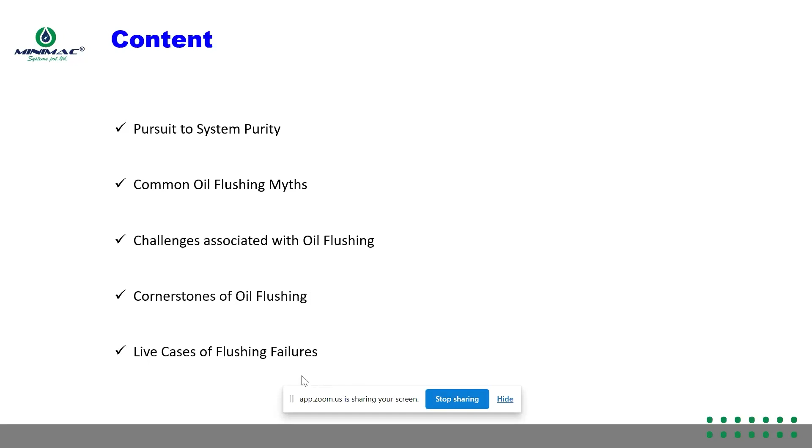Flushing is high velocity flow of low viscosity fluid through a pipeline or a component or a cavity. So I think the machine that you have from Minimac, you can use it for pipeline flushing or associated equipment. You can flush simultaneously. So in that case, you may find a lot of equipment in the field, whether at pre-commissioning stage or at shutdown stage, where you can use this equipment.

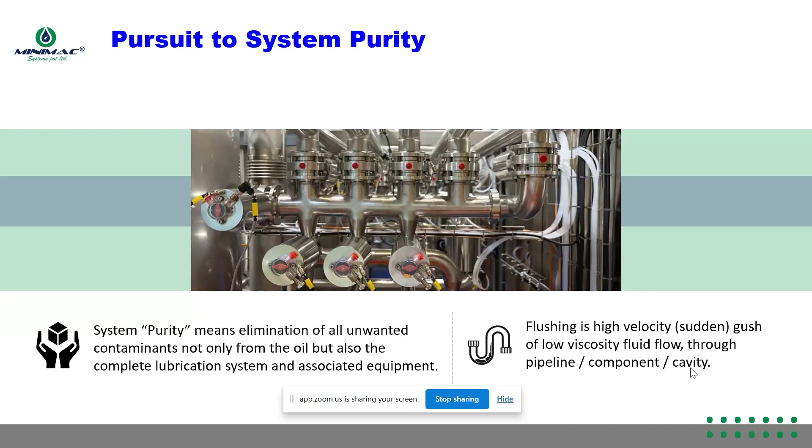Another example, if we see, is a steel plant project in India where there was a failure in a turbine driven blower after commissioning because they did not flush the system before taking it into work. So in a steel plant, the loss was approximately $10 million. Application was turbine driven blower needs to be flushed.

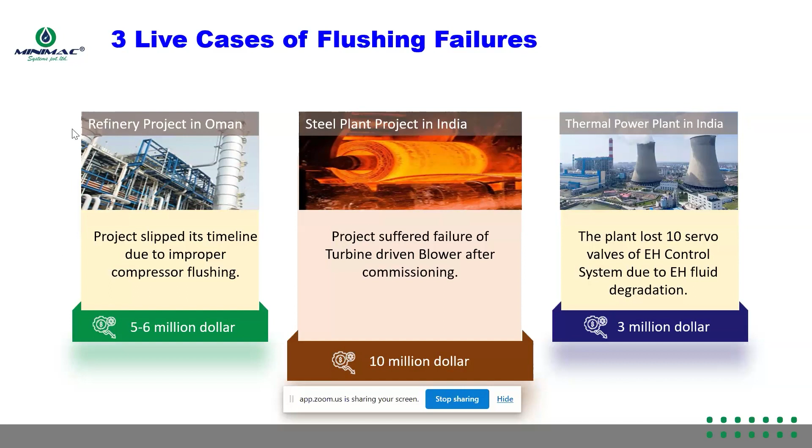So in actual practice, when people visit customers or site or interact with people on a frequent basis, there are certain myths or misbeliefs that they come across. Number one is that oil flushing is only a pre-commissioning activity.

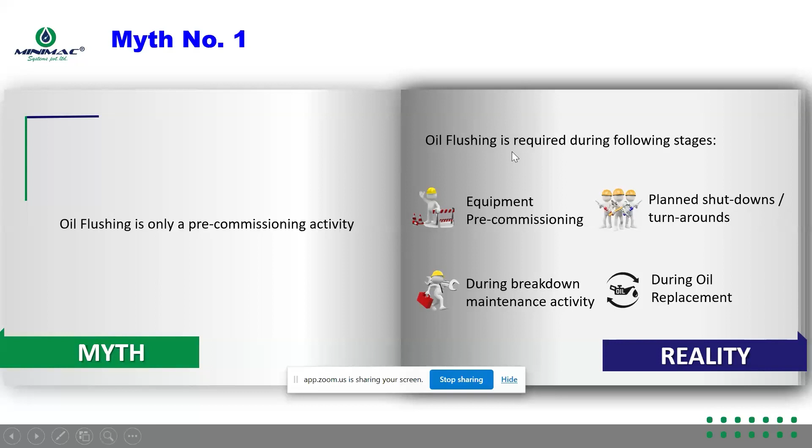So people do believe worldwide that only in pre-commissioning stage flushing has to be carried out. But in actual, along with pre-commissioning activities of an equipment, flushing can also be carried out in a plant shutdown or turnarounds, during any breakdown maintenance activity or in case any breakdown has happened, also during the oil replacement. So these are the four stages where flushing can be carried out.

The other myth that we come across is on-site oil flushing is redundant if rotary equipment was factory flushed and tested by OEM. So people do believe that if the original manufacturer has done the flushing of this part, then there is no need to flush. Instead, at times we have seen that the flushed equipment or the pipelines also do carry certain impurities, the debris or the welding marks, especially the rusting is present there. You can see the photographs.

So normally all the fabricated lines or the interconnected pipelines, any other fabricated equipment may have impurities if it is not properly flushed by the OEM. So in that case, even if the OEM is claiming that this is factory flushed, you may still ask the people to have a check, and there are chances that you may get the opportunity to flush it properly.

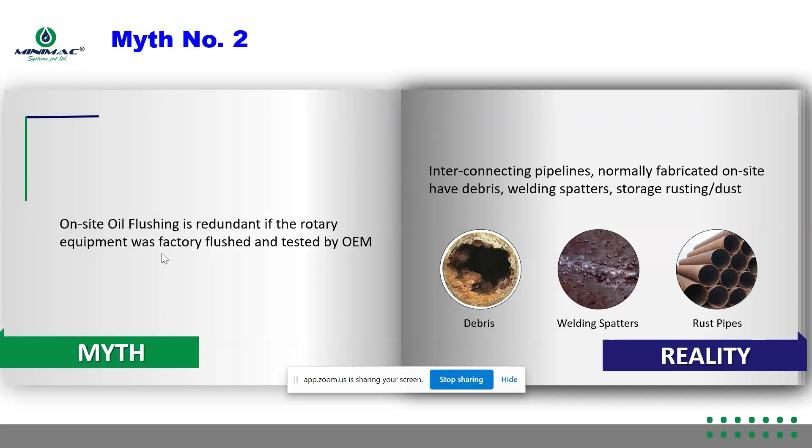Another myth is if chemical cleaning has been performed properly, then there is no need of oil flushing. So in that case, if you can see the photographs here, traces of water and chemicals which are mixed into the oil after cleaning of pipeline. So if any traces of water or chemical from the chemical cleaning are present, as soon as your client puts oil into the system, it will get emulsified, it will get mixed with water, it will get mixed with the chemicals

that were left behind. That chemical need not be filled in the system, but it can also stick to the walls of the pipeline, to the sides of the equipment. It can be anywhere. So in that case, oil will degrade instantly the moment it comes into contact with water or the chemicals used for chemical cleaning. So even after chemical cleaning has been done, oil flushing is a mandatory activity.

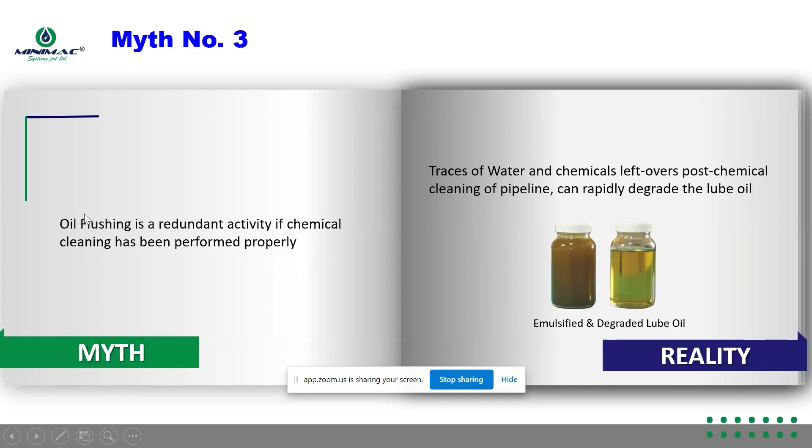Moving on to the next myth that most people come across: efficient oil flushing happens at very high pressure. So this is exactly not how it works. For flushing, a Reynolds flow calculation is present. I will also share this formula with you, or it will be easily available across the web. Reynolds number calculation, we call it. So in ideal conditions, for flushing to be very effective, Reynolds number should be greater than 4,000. If Reynolds number is more than 4,000, turbulence is created in the oil, and with turbulence created, it is best suitable for oil flushing.

So this is a very general and common myth that we come across even at Minimac. Your team also may come across this, that we need high pressure, pressure of 100 or 200 or 400 bar. In that case, we just need to ensure that the flow is turbulent, which means Reynolds number needs to be greater than 4,000. So fluid pressure will not play a major role, but instead, flow rate calculation will be playing the big role.

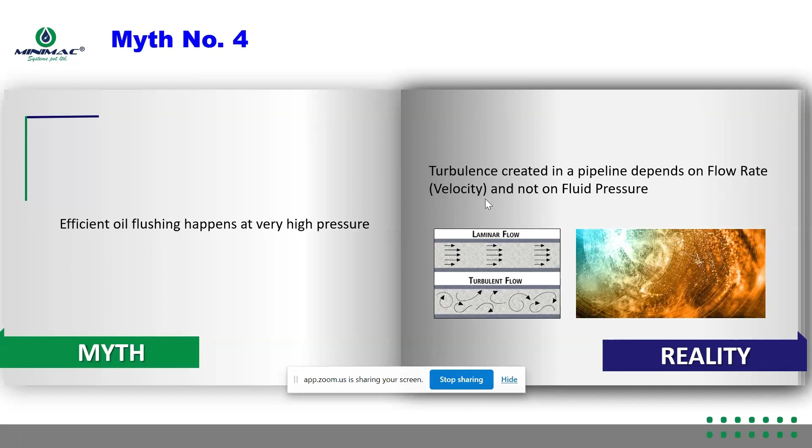Any questions till now, gentlemen? No question yet. Thank you. Moving forward,

another common myth that we see: oil flushing flow rate is decided based on the largest diameter pipeline of the lubrication system. In this case, it is not just the largest diameter pipeline of the lubrication system, but also the branches of the pipelines. Suppose there are multiple pipelines coming out of the bigger pipeline. In that case, all the pipelines need to be flushed properly. So this is a complete myth that only our biggest pipeline, being 4 inches, 6 inches, or 8 inches, matters. Instead, we should also consider the branches of the pipelines.

This is a very common case where hydraulic power packs are used, or in case heat exchangers are used. You can see in the photograph here, a skid is made up and multiple lines are coming up. So the bigger pipeline might have a larger diameter, but certainly we need to consider the small pipelines also, which are coming out. So when you are doing the flow rate calculations for the flushing, you need to consider all the pipelines which are associated to the system that we are going to flush out.

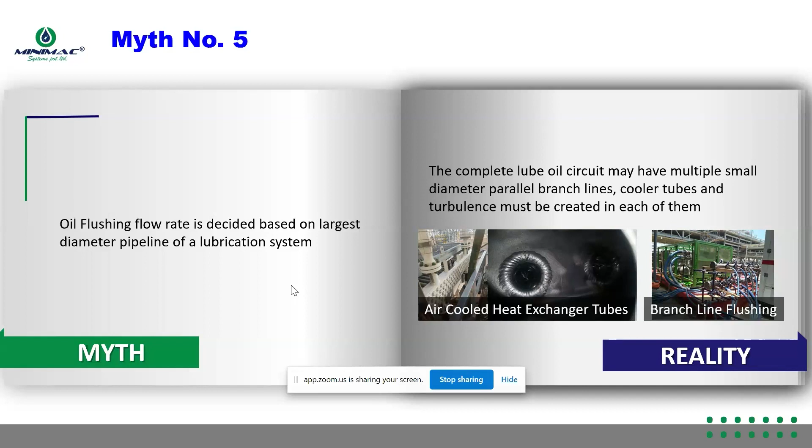Moving to our next myth, oil flushing is all about attaining and generating reports on NAS 1638 or ISO 4406. These are standards for oil cleanliness. So it is a very common myth that if the NAS or ISO values are attained, the oil is very clean. In fact, this is a myth we are experiencing worldwide.

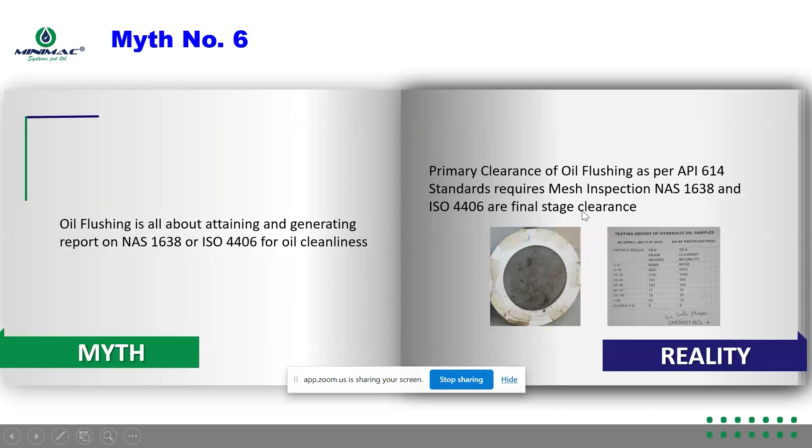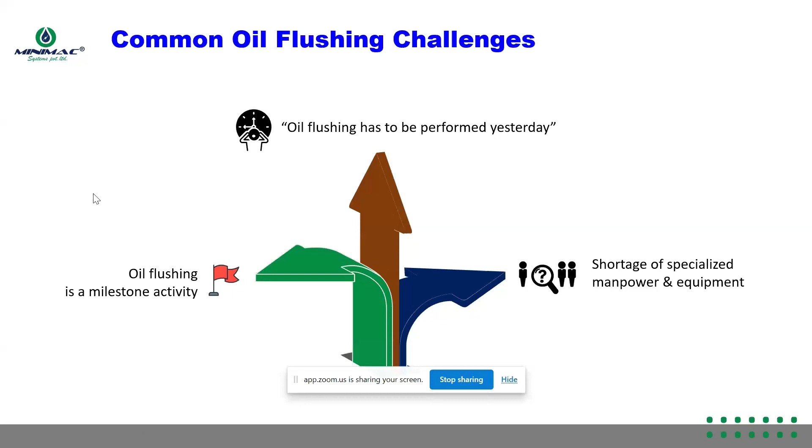I will just showcase the previous slide where this was mentioned. So you see NAS class, ISO class, and mesh inspection. These three could be the defining parameters of the milestone that has to be achieved for oil flushing. Because at a certain point, when this milestone is achieved, this activity has to be considered completed and flushing is done.

The lower the fluid viscosity, the better the chances of obtaining better cleanliness. In this case, I would certainly tell you, if you are flushing with oil of 32 cSt, or VG32 hydraulic oil, you will certainly find a higher Reynolds number compared to using a higher viscosity oil.

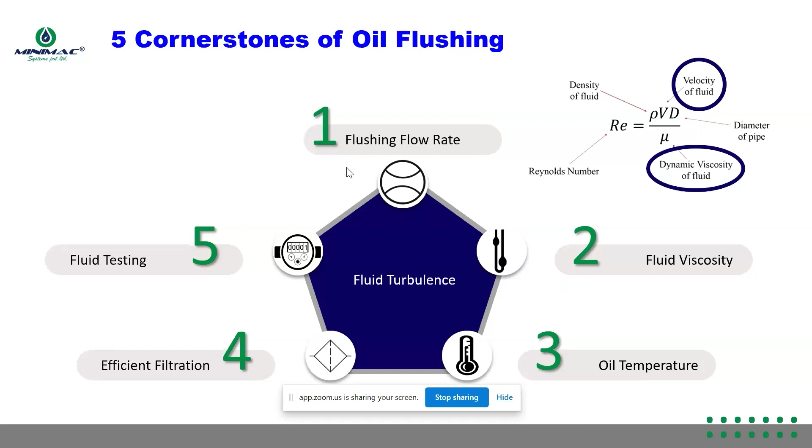Okay. So here you see flushing flow rate, which means how you have to calculate the flow rate required for efficient flushing of a system. Number one is turbulent flow. The formula we have already seen in our previous slide. Your calculation should ensure that Reynolds number is more than 4000 at any point. In that case, particles of fluid will have a turbulence effect and certainly efficient cleaning.

Number two, each parallel branch line must have turbulent flow. This is what I told you, where a bigger pipeline is going in as a mainstream pipeline, and it has multiple branch lines. Not only does the bigger pipeline need to have turbulent flow, but also the parallel lines running through the system, or the other equipment in the branch lines, need to have turbulent flow. So the entire system will be flushed out.

Number three, the flushing pump must have sufficient back pressure handling capacity. In most cases when we are flushing, there is a certain back pressure from the equipment that we are flushing. So the pump must be capable of handling that back pressure, which means the pump should be generating enough pressure. In your case, I think the skid has a maximum pressure of 60 bar, which is quite a good range. So all your calculations must ensure these 3 pointers, so you can pitch your product to clients.

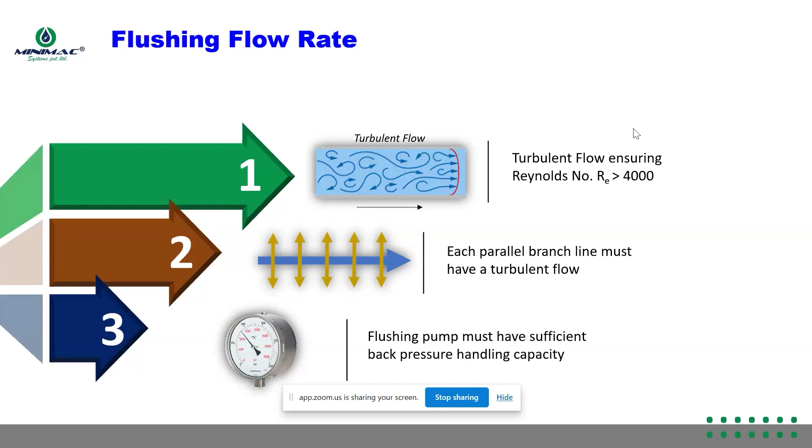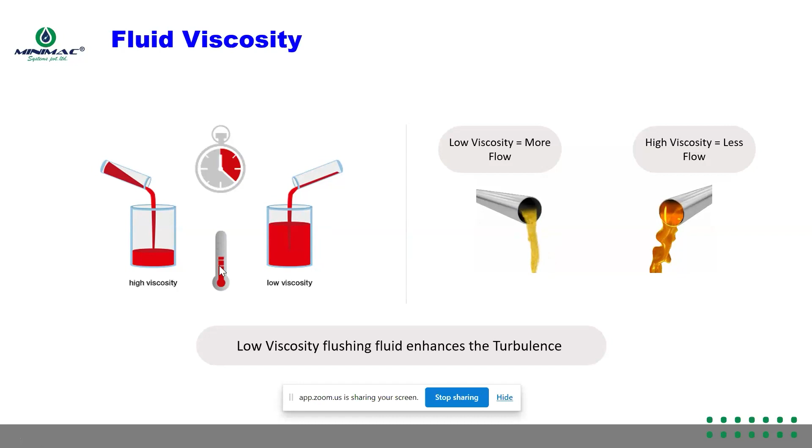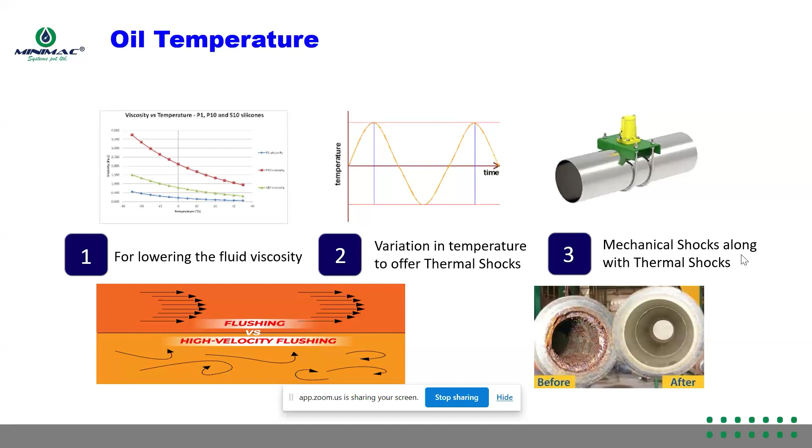Efficient filtration. So now since we have been learning regarding the flow and the process of how we are going to flush, another important parameter is efficient filtration, in which when the oil is continuously being flushed and the equipment is being flushed, all debris comes into the oil itself, and we need to collect these particles from the oil. You need to collect the debris which is flushed at downstream, ensure the fluid is super clean at upstream, and also ensure the filter micron selection, filter efficiency, and dirt holding capacity. These data sheets will be present with you, or if not, we can share them again.

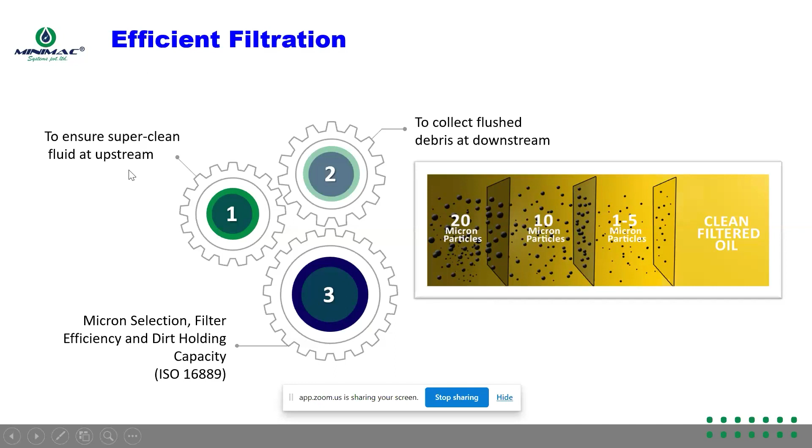Next is regarding fluid testing. There are three different parameters for fluid testing which can be considered for milestone activity. Both site people and sales and BD people can note down these points. This will be the end parameter to conclude a flushing activity, or to discuss the stages of flushing and when this activity has to be stopped. So every person can check these values with the client.

There are three parameters of fluid testing which complete flushing as a milestone. Number one is mesh inspection as per API 614 standard - you see a clear mesh is present, which concludes the flushing now. Number two is NAS 1638 - there is a NAS chart present, or if required I can also share it with you. Number three is ISO 4406, the particle distribution.

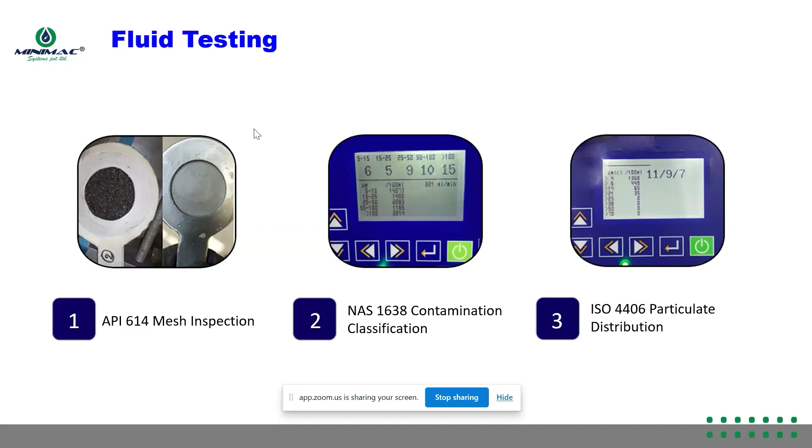So these are just the three parameters which you need to check with the client or at site when you are flushing. This needs to be predefined by people. And when you are working at site, when these three parameters are achieved, you may conclude that flushing is complete. So people of sales and also people at site may use this information.

This is a typical flushing circuit where you see this is a pump. You can consider this as a flushing unit that we have manufactured. It has a flushing line filter upstream. After this, this is a lube oil system pipeline which needs to be flushed. So oil from here goes into this system. Oil is drawn from a reservoir with a heater.

This tank, you might have seen it is present in this kit. After this oil tank, it goes into the pump, which goes into the line filter. After this, this oil is distributed into the entire system. After this, all the debris and oil comes into the return line filter. This return line filter collects all the particles coming from the lube oil system being flushed. After filtering the oil and capturing all the solid particles, this oil is again filled into the oil reservoir. This reheats the oil and it circulates again. So this is a very general arrangement of a flushing circuit.

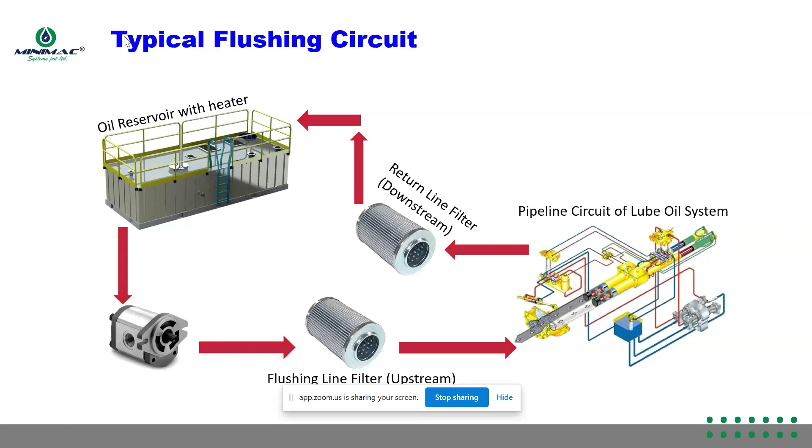These are a few of the kits that we manufacture. This is a lube oil and chemical cleaning kit. After this, these are hydraulic fluid flushing kits. These are a few of the reference standards that we follow. These are multi-purpose kits and can be used for various jobs.

Excuse me, can we go back to the previous slide, for the skids, for the equipment? Yes, this one - so this equipment can be used both for chemical cleaning and lube oil flushing, is that correct, the green one? Yes, it can be used. Ah, okay.

But a few things need to be considered. When we are doing chemical cleaning, in that case particle counters cannot be used because particle counters are not suited for that. I hope we can talk more about this later, maybe after this meeting. Yeah sure, no problem, thank you.

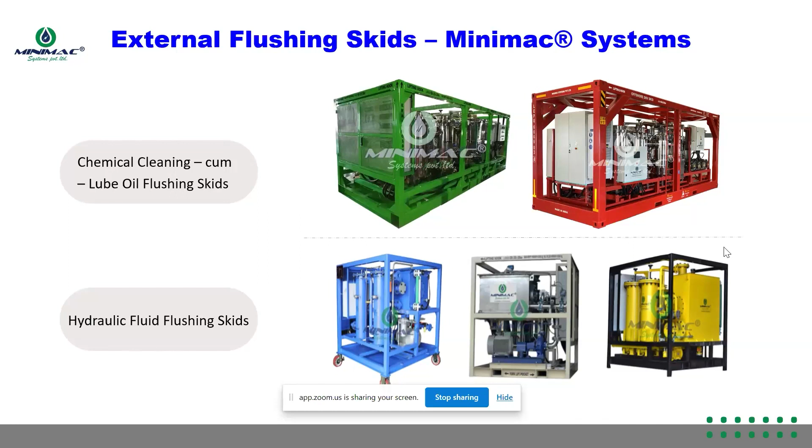These are a few of the reference standards of flushing worldwide. All these standards are through OEMs like Solar Turbines, GE, or various agencies. So these are all the standards of flushing.

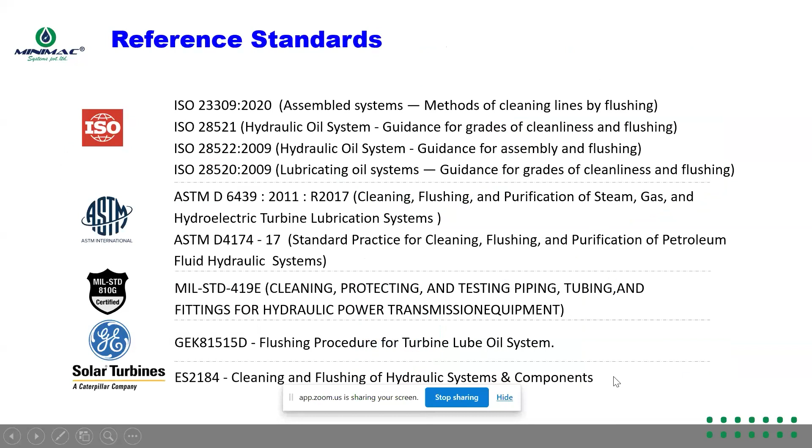These are a few site pictures of our machines and the offerings that we do, which are mentioned here. Not only machine supply, we also do services. We also provide expertise, manpower, training sessions, and a lot more.

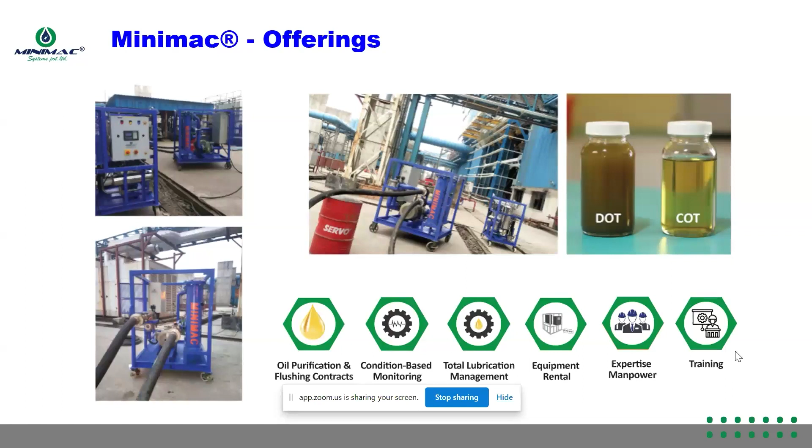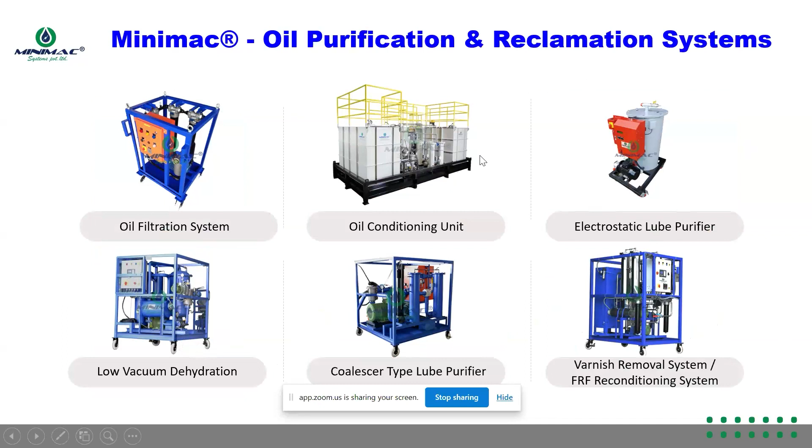In this, you can see the other equipment we have in our fleet. These are oil purification systems for different problems being faced, and a few case studies which are Minimac experiences.

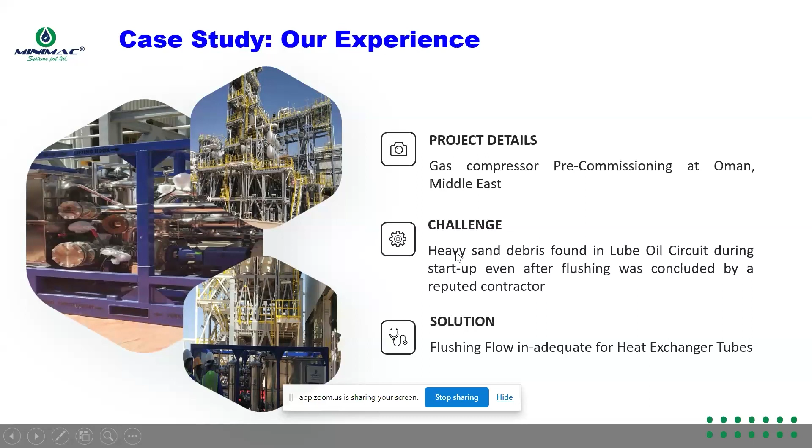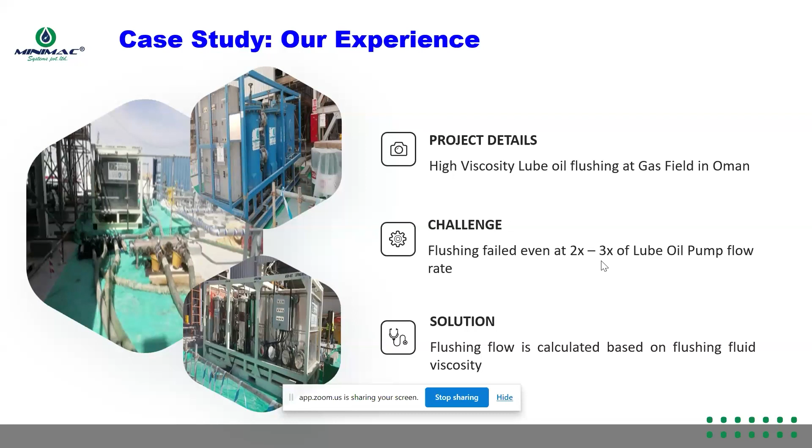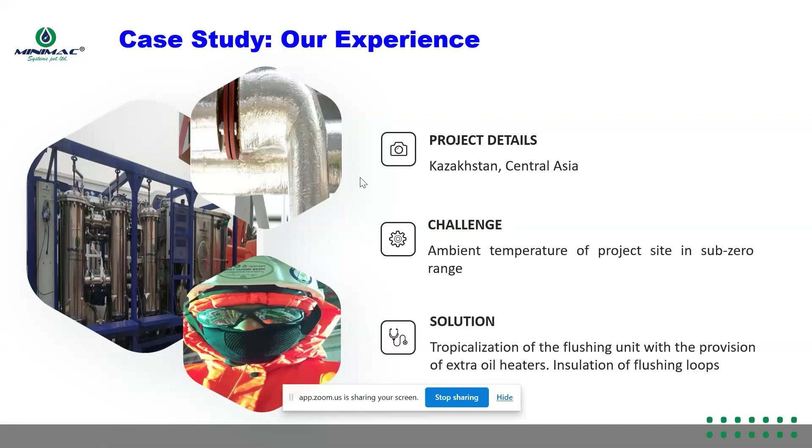So with mesh inspection, API 614 standard, now we did conclude this site. Not only the particle counter showing the value, but this mesh inspection will be a crucial game changer in flushing cases. So you need to ensure with the client that we will be doing this mesh inspection.

This will certainly give you more time on schedule and certainly more rentals. I will tell you that it is easier to get purity levels at a particle counter, NAS values, but it will take more time to get this mesh clear.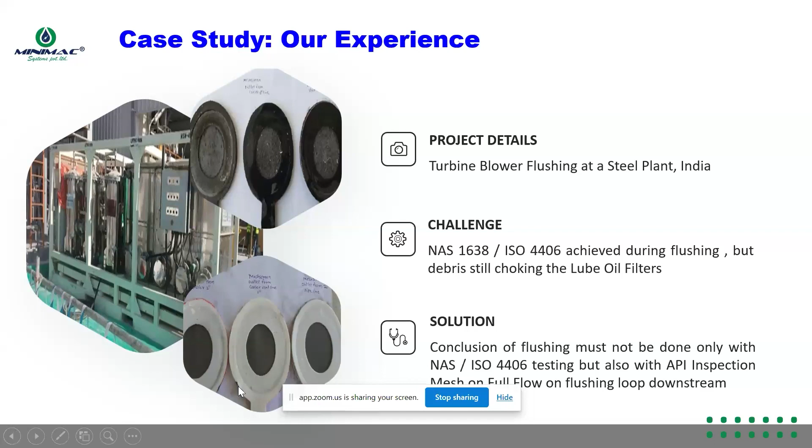Alright. Flushing is the first step of machine reliability. You need to make it mandatory, not as an option. Flushing should be mandatory in case. Thank you. So that's all from our side, and we welcome your questions.

Jimri. Thank you very much.

So I hope I have given you a very good idea where you need to pitch your product, your flushing machine. Your sales and BD people can discuss these points with the client. The people who are working at site, once you get the order, they also need to be educated in a similar fashion. So I hope this information was good to you.

Okay, thank you so much, Amal. Do we have any question for him, please? There is no question from Uganda, at least. Everything is clear. We'll be waiting for a copy of the shared presentation. Thank you.

Okay, Port Harcourt team, Lagos team, do we have questions? None for now, Claret. Not for now, I don't see any questions from this side yet. Okay, but I hope we understood all that he has said?